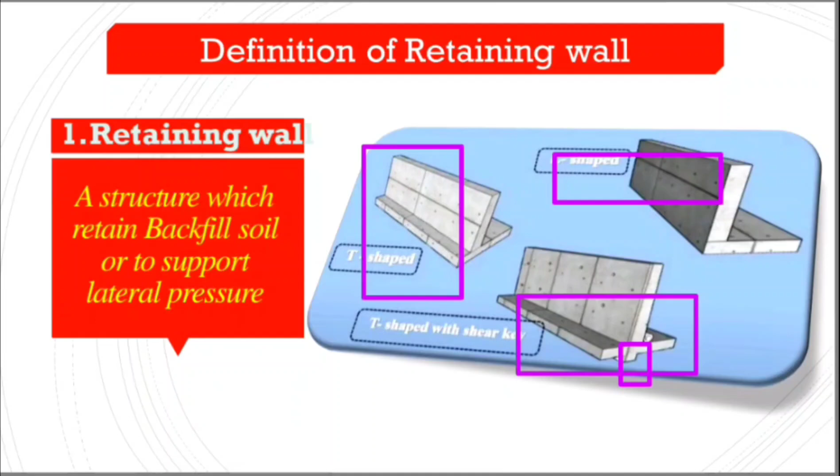There are different types of retaining wall: gravity retaining wall, semi-gravity retaining wall, cantilever retaining wall, buttress or counterfort retaining wall. The function of the retaining wall is the same, to resist the backfill soil or resist the pressure caused by the backfill. So the main function is this, and on the basis of this function, retaining walls are divided into different types. Number one is gravity retaining wall, then semi-gravity retaining wall, cantilever retaining wall, and buttress retaining wall.

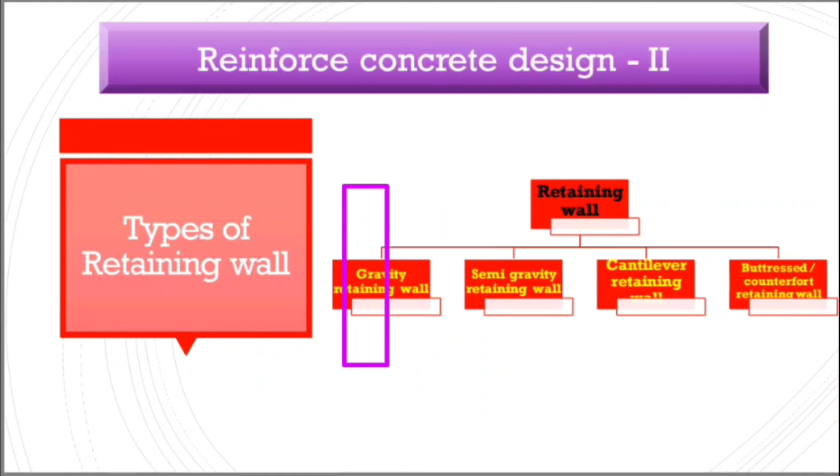Gravity retaining walls are those retaining walls which resist the backfill or lateral earth pressure caused by the backfill by their self-weight. With the help of its self-weight, it will resist the backfill. So from this we know that it may have large size, sections of large sizes, so it may be non-economical, and it is non-economical due to its huge geometry and more size.

And the second type of retaining wall is the semi-gravity retaining wall, which is a modification of the gravity retaining wall, in which we introduce a minimum amount of reinforcement to reduce its size and resist the backfill or lateral pressures. So here it's the semi-gravity retaining wall. On one side the backfill, normally soil, is retained by the wall of the stem, and here are the other parts. So this is the typical diagram of the semi-gravity retaining wall.

It's also not economical. Because it's the modification of the gravity retaining wall, it is economical as compared to the gravity retaining wall, but as compared to other retaining walls, it is not economical. Remember, this is the main point. This is a modification of the gravity retaining wall, in which a minimum amount of reinforcement may be installed in the wall to reduce the sizes. The size of the gravity retaining wall is more as compared to the semi-gravity retaining wall.

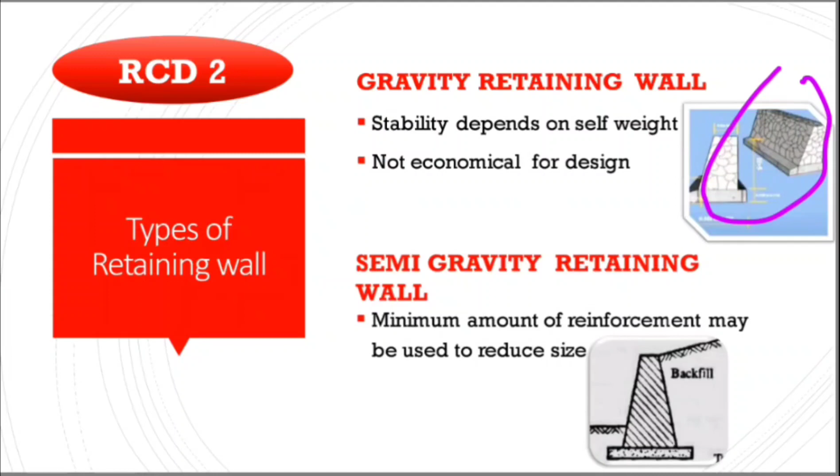The third type of retaining wall is the cantilever retaining wall, in which one side is fixed and the other sides are cantilevered. So from this we know that these are completely reinforced retaining walls. These consist of L-shape, T-shape, and T-shape with shear key. So there are different types of cantilever retaining wall. It consists of a thin stem. The vertical part of the retaining wall is called the stem. Here you can see that this is the stem, and the base, also called heel and toe, is called the foundation of the retaining wall.

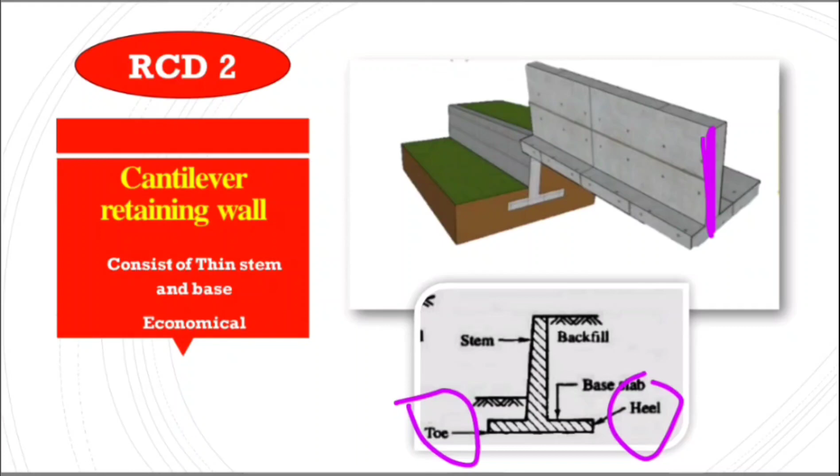So these types of retaining wall are widely used because of the reduced sections and reduced sizes as compared to the semi-gravity and gravity retaining walls, and they are economical as compared to the previous retaining walls. So these are different typical diagrams of the retaining wall. It has heel part, toe part, base slab, toe slab, backfill, and stem, which is also called the arm of the retaining wall. Another modification of the cantilever retaining wall is the buttressed or counterfort retaining wall, in which on each side or one of the sides we provide inclined braces, inclined supports, to support the stem or arm of the retaining wall.

So on the basis of the placement or location of the counterfort, or the inclined support, the retaining walls are divided into two types. The one is the buttressed retaining wall and another is the counterfort retaining wall.

If the inclined supports or the inclined braces or the counterforts are provided at the backfill side, then the retaining wall may be said to be a counterfort retaining wall, in which the braces are provided at the backfill side. You can see that this is the backfill side. Here the soil is retained by the retaining wall. The supports or the counterforts are provided at the backfill side. So this type of cantilever retaining wall may be called a counterfort retaining wall.

If these inclined braces or the buttresses are provided at the opposite side of the backfill, then this cantilever wall is said to be a buttress cantilever wall. From the figure you can see that this is the backfill portion, and here the buttresses are provided. So the only difference is the location of the counterforts or buttresses. From this we will name the retaining wall.

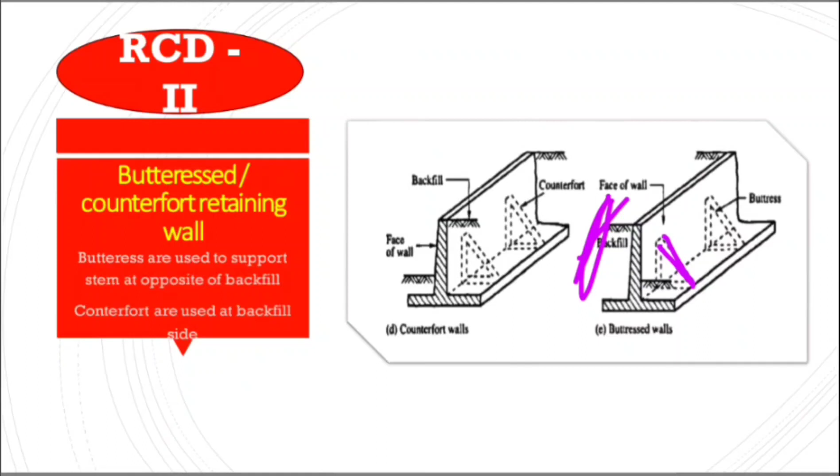So the main purpose of all types of retaining wall is to retain the backfill or resist the lateral pressures. There are different components of the retaining wall that will be used in design. We will design each component, its thicknesses, the reinforcement, and we will check the stability. Three different checks: stability checks, overturning checks, and the beneath soil pressure checks.

So there are different components of the retaining wall. The major one is the stem, the vertical part of the retaining wall which retains the backfill, which is called the arm or stem of the retaining wall. The second one is the foundation of the retaining wall, which consists of the toe slab and heel slab. Here you can see the heel and toe. What is the difference between toe and heel?

Heel is the part of the retaining wall at the backfill side, meaning the foundation or base of the retaining wall at the backfill side, and toe is the foundation of the retaining wall opposite the backfill side, at the face side. That slab or base of the retaining wall is called the toe. This is the only difference between toe and heel.

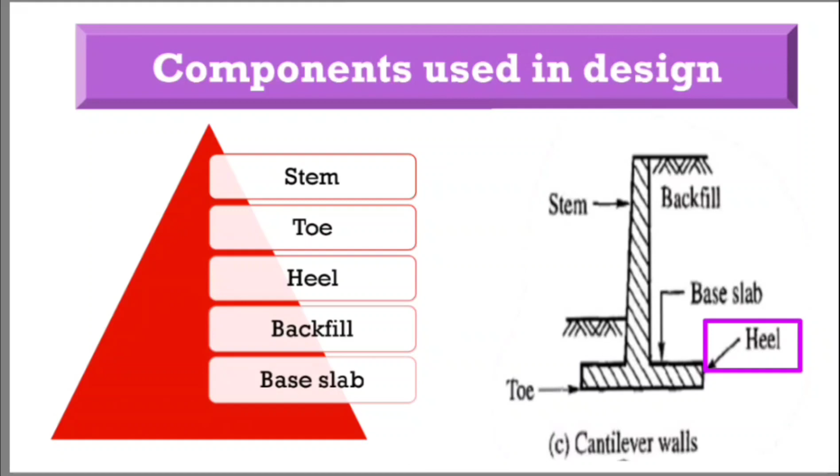A lot of weight comes on the heel slab and less on the toe slab, and the arm is the vertical portion of the retaining wall which retains the soil, and the foundation is on which the arm is seated, which transfers the loading to the soil beneath.

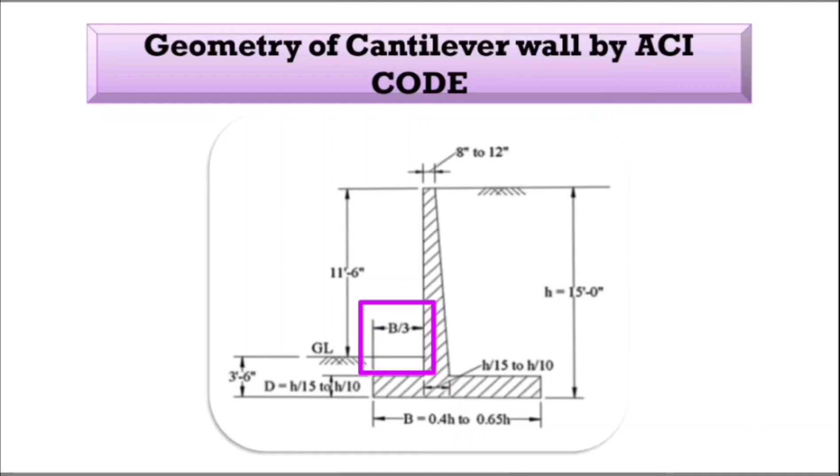The base of the retaining wall should be in the range 0.4h to 0.65h, where h is the depth of the retaining wall from the top of the stem to the bottom of the foundation or base slab, and the thickness of the toe slab or heel slab should be in the range h/15 to h/10, and the length of the toe should be 1/3 of the base length. So this is the geometry of the cantilever retaining wall as per the ACI code. We will cover this topic in detail while solving a numerical.

So now we will discuss different types of failure in retaining walls. There are mainly three types of failure that occur in retaining walls. In the first one, the parts of the retaining wall may fail. The parts of the retaining wall are the stem, toe, and heel. These may fail and not provide enough resistance to support the backfill, so the structure may fail. This is a structural failure. Another failure is the stability failure, meaning bodily displacement of the retaining wall occurs.

The overturning may occur, the sliding of the retaining wall may occur. I will show the figure of the sliding or overturning in the next slide. And the beneath soil may fail if the soil does not provide sufficient bearing capacity, so it may settle and the whole retaining wall may fail. So these three major failures will occur in a retaining wall.

While designing a retaining wall, we will counter each of these failures. If anyone is allowed to fail, the whole function of the retaining wall will fail. So in design we should consider these and counter these failures.

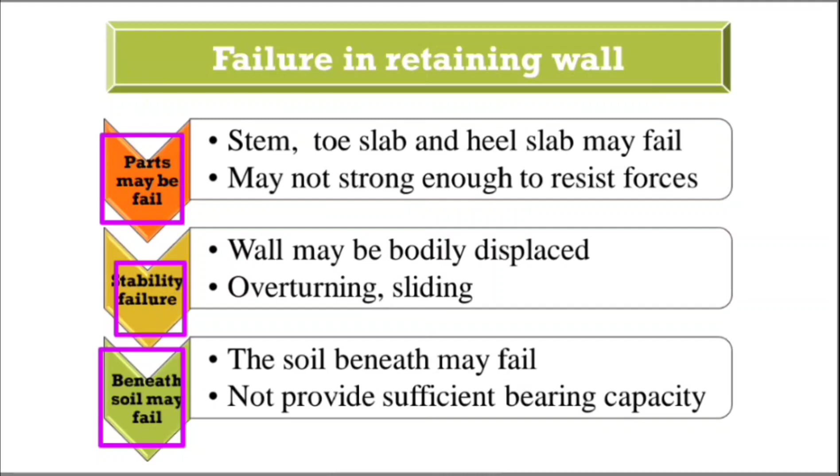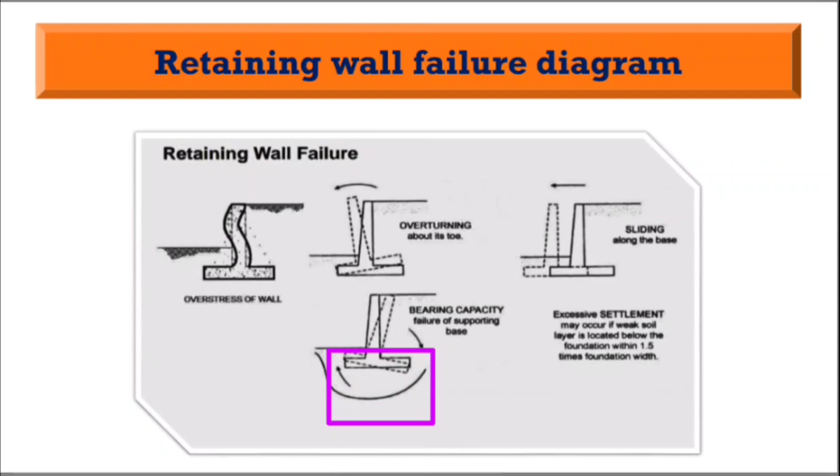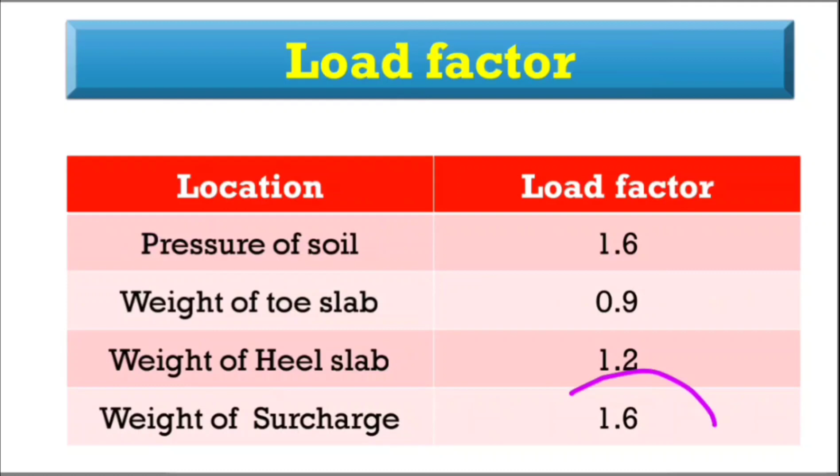Since we are designing a retaining wall or any structure as per the amplified load and reduced strength, we will amplify load by introducing a load factor. So there are different load factors for the retaining wall at different locations. For the pressure of the soil or the backfill, we will use the load factor 1.6, and for the weight of the toe slab the load factor will be less, 0.9. For the weight of the heel slab, 1.2. For the weight of the surcharge we will use the load factor 1.6. So the surcharge is taken as a live load.

This is the very important slide of a retaining wall. What is the resultant lateral pressure and what will be the location of this lateral pressure? If there is no inclined backfill and no surcharge, then the lateral pressure will be 1/2 Kah W h². W is the load, h is the depth or the height of the backfill, and K is the lateral earth coefficient for the active case. So this will be the first formula for this scenario.

And for the second condition, if the backfill soil is inclined, then the formula may be changed. The lateral earth pressure will be 1/2 Ka W H², where K is the lateral earth coefficient, W is the factored load, H is the depth of the backfill soil, and Ka can be calculated by K cos theta, and theta, the resistance between the soil and the retaining wall, may be taken as the angle of internal friction. This will be the formula, and y will be H/3. This will be the location of the resultant force. For this condition, only K will be changed.

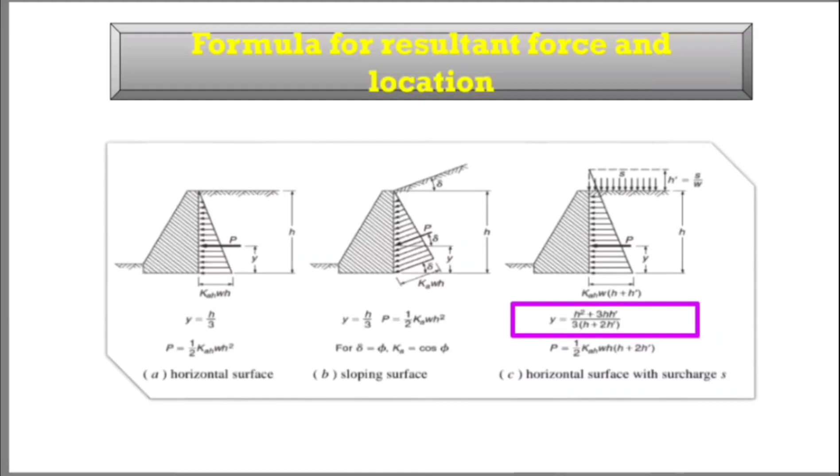So the formula and the location for the resultant force will change as per the scenario at the site. This is the very important slide of the lateral earth pressure and the location of the resultant force in a retaining wall. These will all be used in the analysis part of the numerical questions, for moments and the stability checks.